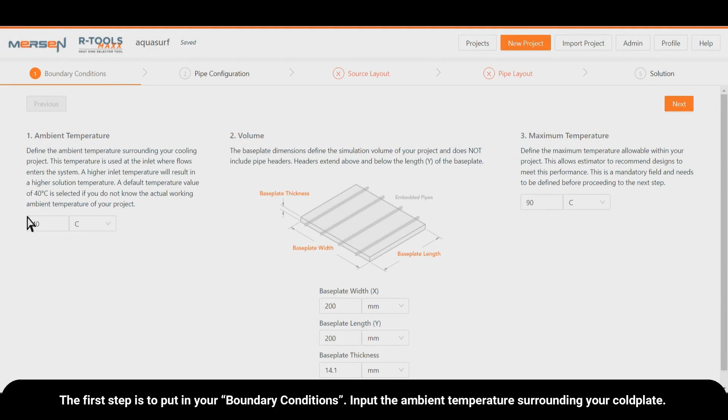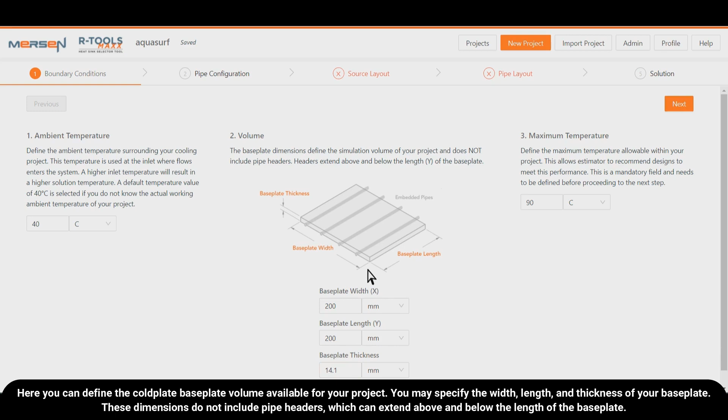Here, you can define the cold plate base plate volume available for your project. You may specify the width, length, and thickness of your base plate. These dimensions do not include pipe headers, which can extend above and below the length of the base plate. Please account for space for headers in your system when determining your base plate volume.

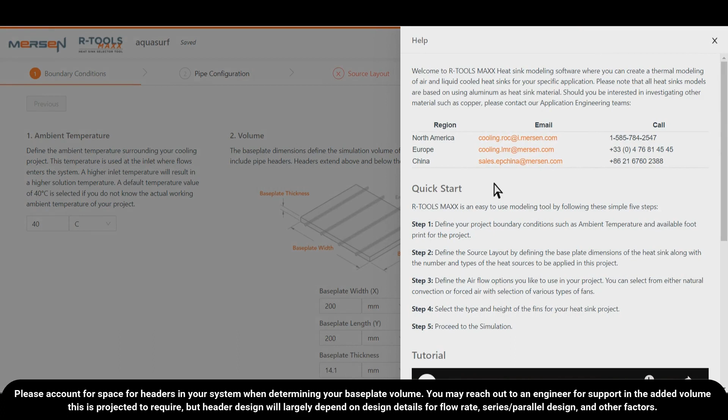You may reach out to an engineer for support in the added volume this is projected to require, but header design will largely depend on design details for flow rate, series or parallel design, and other factors.

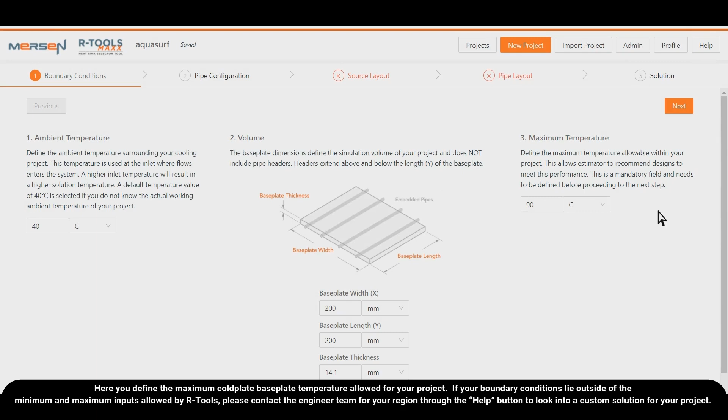Here, you define the maximum cold plate base plate temperature allowed for your project. If your boundary conditions lie outside of the minimum and maximum inputs allowed by R-Tools, please contact the engineer team for your region through the Help button to look into a custom solution for your project.

All inputs are saved automatically. Even if you close your tab, you can come back to see all your parameters as you set them.

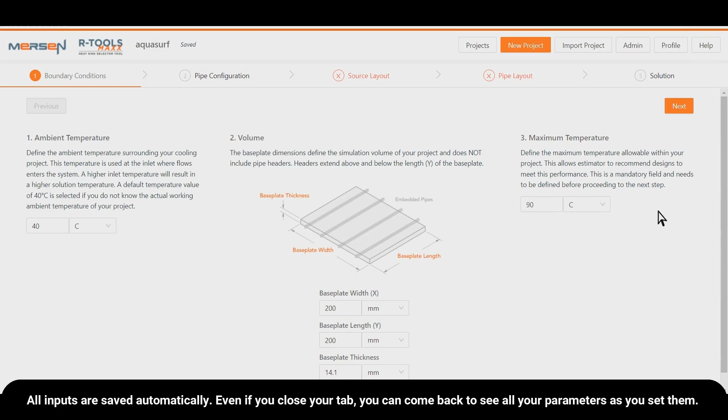On to the Pipe Configuration tab. Here, you specify boundary conditions for the pipe and fluid. To start, please input the inlet fluid temperature of the fluid entering the cold plate, the flow rate of this fluid, and the max allowable pressure drop for the cold plate.

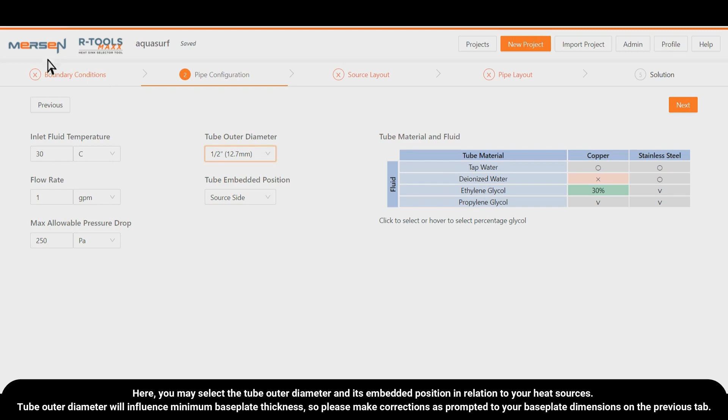Here, you may select the tube outer diameter and its embedded position in relation to your heat sources. Tube outer diameter will influence minimum base plate thickness, so please make corrections as prompted to your base plate dimensions on the previous tab.

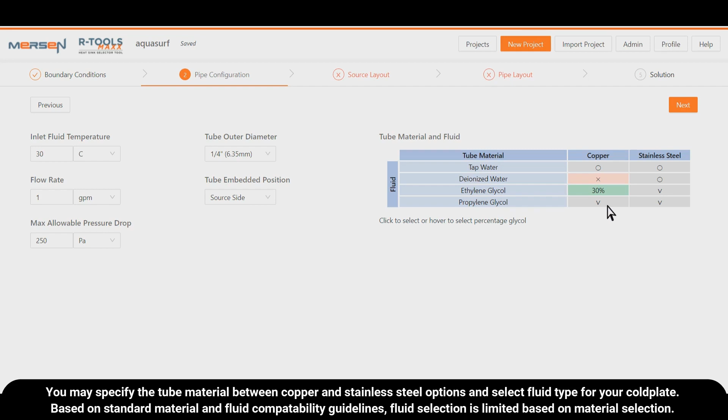You may specify the tube material between copper and stainless steel options and select fluid type for your cold plate. Based on standard material and fluid compatibility guidelines, fluid selection is limited based on material selection.

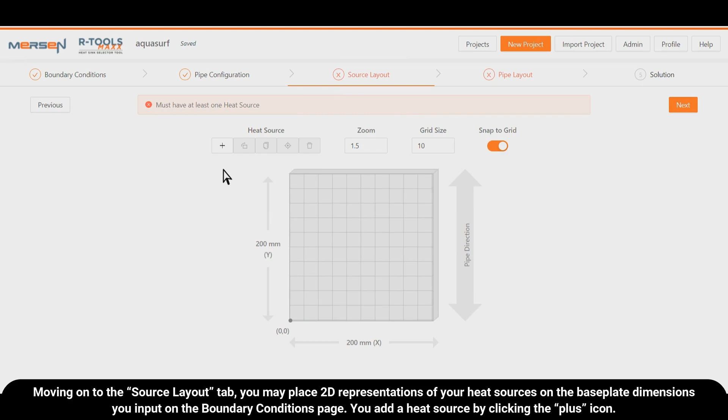Moving on to the Source Layout tab, you may place 2D representations of your heat sources on the base plate dimensions you input on the Boundary Conditions page. You add a heat source by clicking the plus icon.

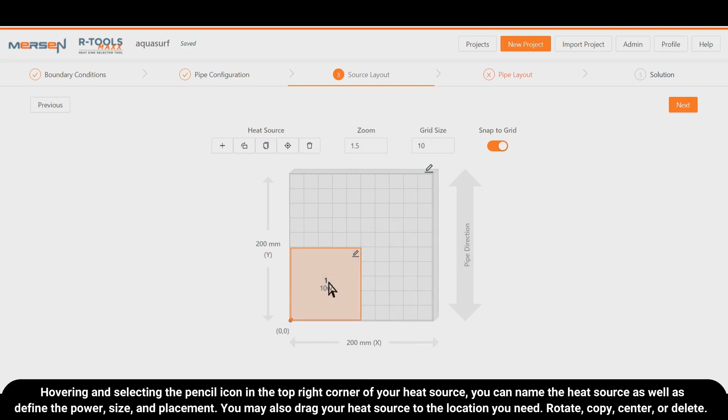Hovering and selecting the pencil icon in the top right corner of your heat source, you can name the heat source as well as define the power, size, and placement. You may also drag your heat source to the location you need. Rotate, copy, center, or delete.

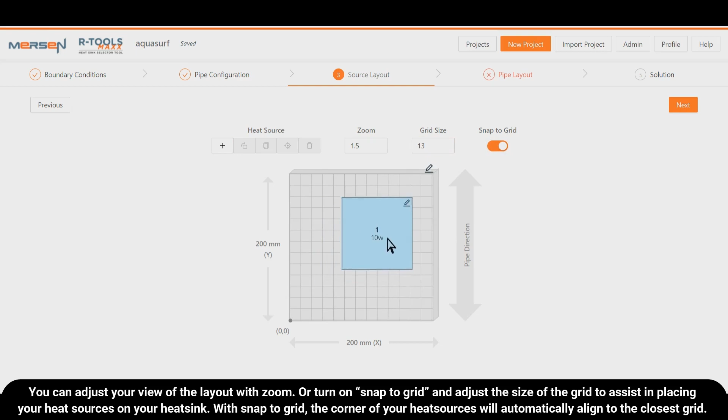You can adjust your view of the layout with zoom, or turn on snap to grid and adjust the size of the grid to assist in placing your heat sources on your heatsink. With snap to grid, the corner of your heat sources will automatically align to the closest grid.

If your placed heat sources overlap, your estimated and simulated performance will be incorrect. Please ensure your heat sources are placed properly.

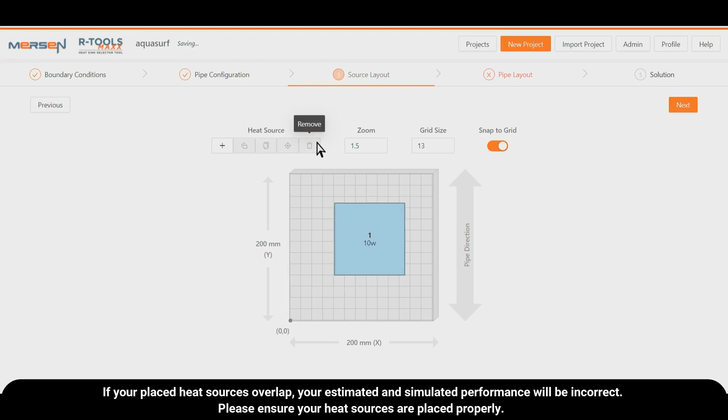On the Pipe Layout tab, you may place 2D representations of your pipes on the baseplate dimensions you input on the Boundary Conditions page, under the heat sources you placed on the Source Layout page.

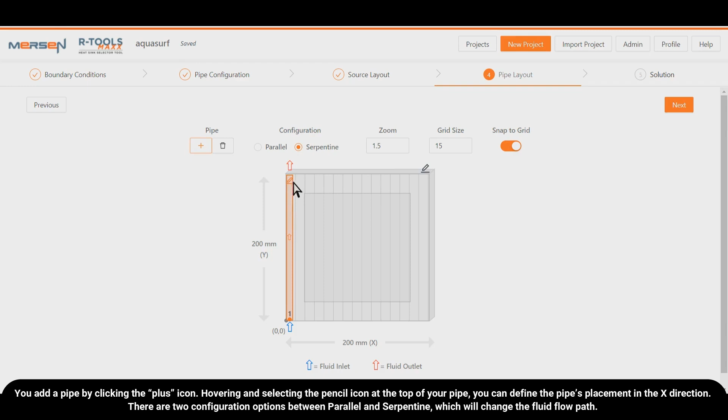You add a pipe by clicking the plus icon. Hovering and selecting the pencil icon at the top of your pipe, you can define the pipe's placement in the X direction, or you can drag and drop similar to how you did on the Source Layout tab.

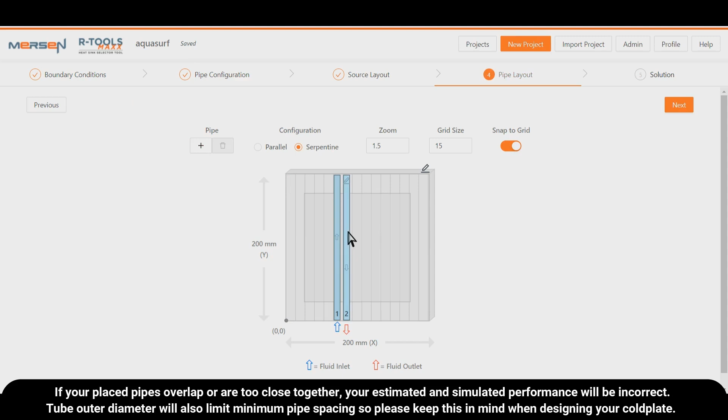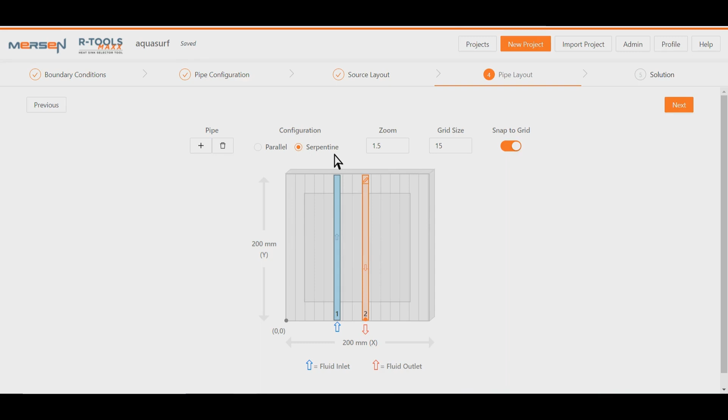If your placed pipes overlap or are too close together, your estimated and simulated performance will be incorrect. Tube outer diameter will also limit minimum pipe spacing, so please keep this in mind when designing your cold plate. There are two configuration options between parallel and serpentine, which will change the fluid flow path.

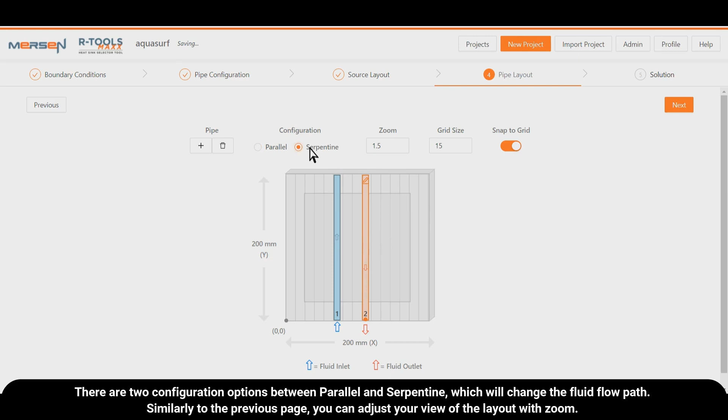Similarly to the previous page, you can adjust your view of the layout with Zoom, or turn on Snap to Grid and adjust the size of the grid to assist in placing your pipes on your base plate. With Snap to Grid, the corner of your pipes will automatically align to the closest grid.

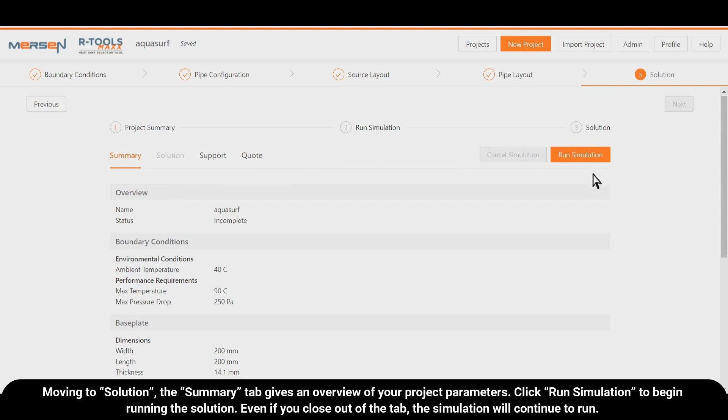Moving to the Solution page, the Summary tab gives an overview of your project parameters. If the parameters look good, click Run Simulation to begin running the solution. Even if you close out of the tab, the simulation will continue to run.

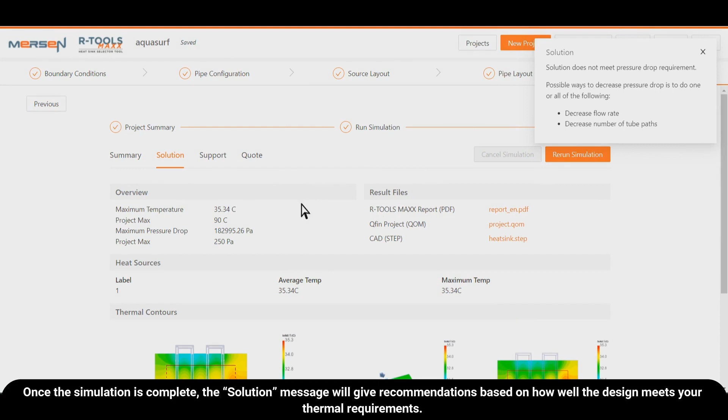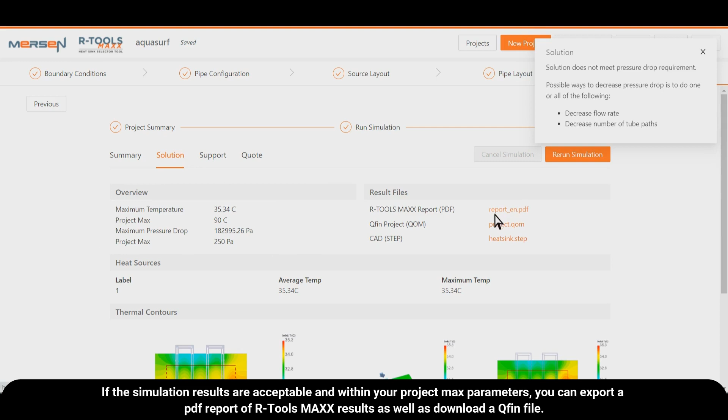Once the simulation is complete, the solution message will give recommendations based on how well the design meets your thermal requirements. If the simulation results are acceptable and within your project max parameters, you can export a PDF report of R-Tools MAXX results, as well as download a Qfin or STEP file.

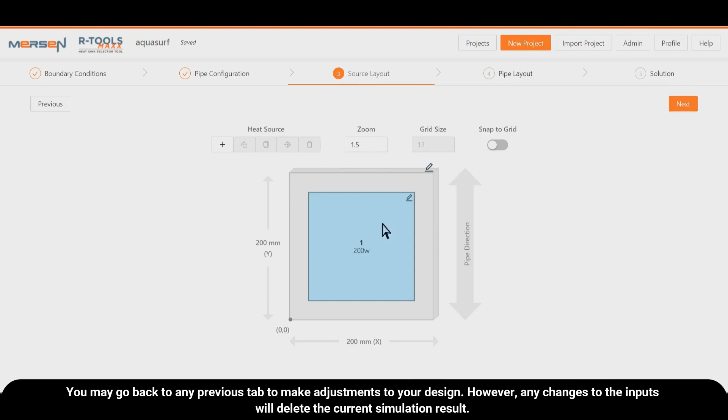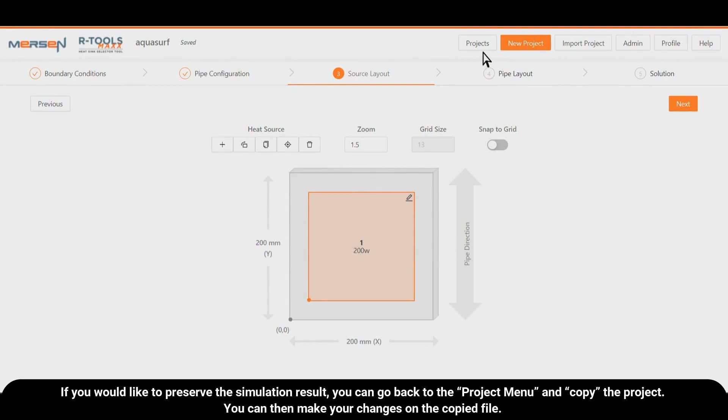You may go back to any previous tab to make adjustments to your design. However, any changes to the inputs will delete the current simulation result. If you would like to preserve the simulation result, you can go back to the project menu and copy the project. You can then make your changes on the copied file while preserving your previous results.

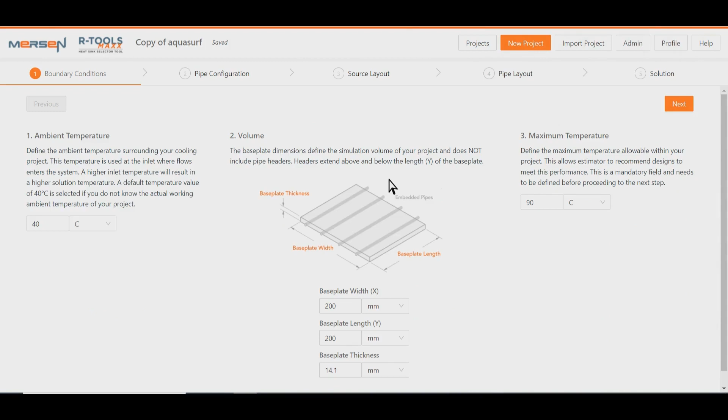When you are ready, these files can be sent to our engineering team with the Quote tab to receive a quote on your design. This concludes our tutorial on designing an AquaSurf cold plate.